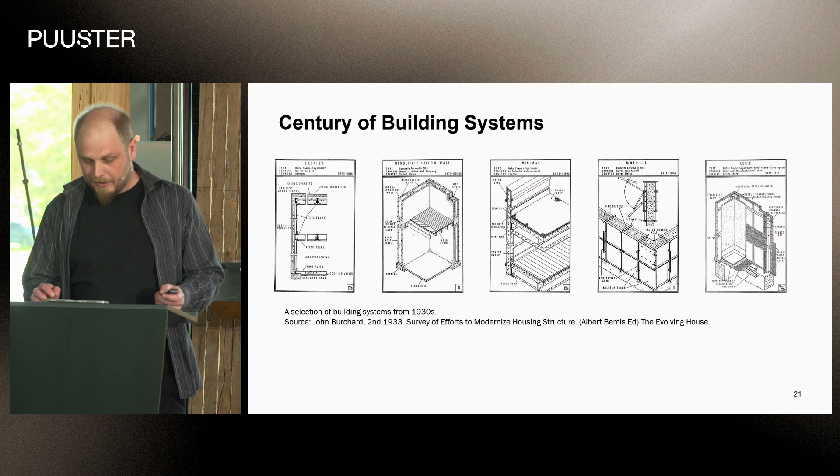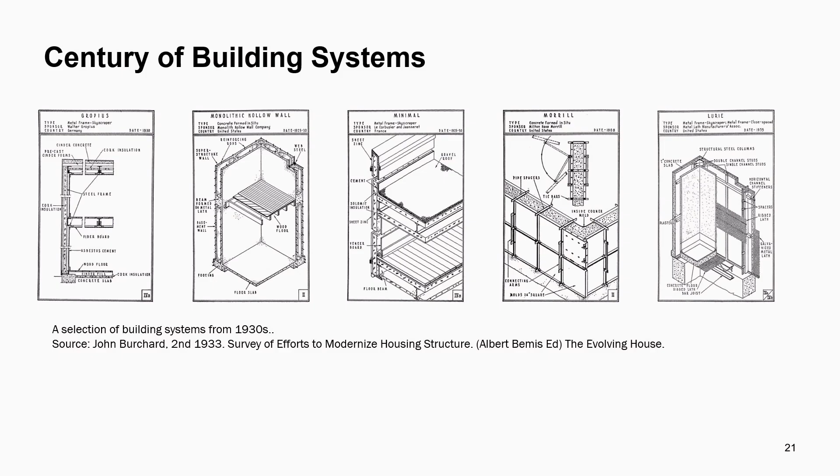Expected productivity growth in construction. So the images here are actually building systems from 100 years ago, and the expectation to a better and higher quality mass housing was also already there back then, coming with the industrialization.

So my research aims to identify key challenges in designing for modular construction and building systems. By understanding these challenges, we can develop better digital tools for architects, bridging gaps between design, manufacturing, and digital workflows. One of the common issues here is integrating data across design tools and stages for the building design.

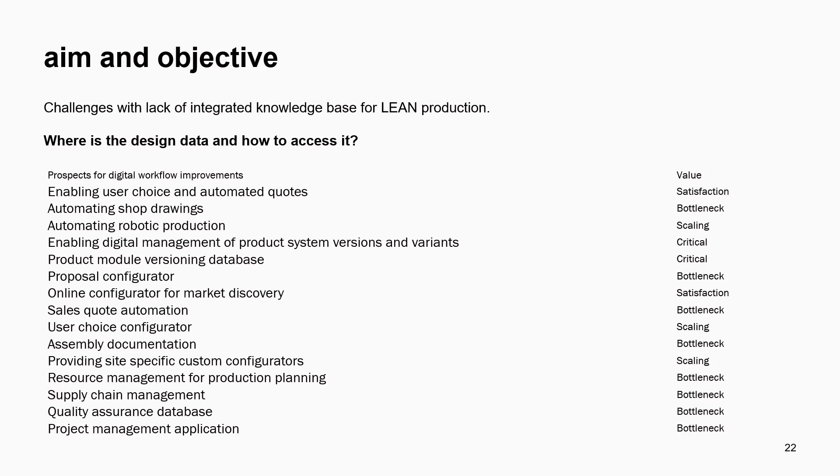A major challenge for manufacturers' workflows is quickly and accurately responding to architectural proposals within digital and regulatory constraints. Aligning proposals with production and supply chain processes remains difficult. Digital tools can help better integrate and streamline design to production workflows and feedback.

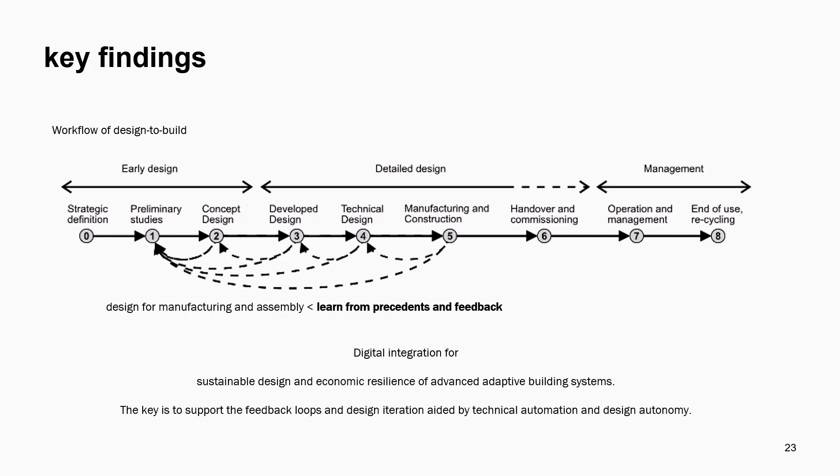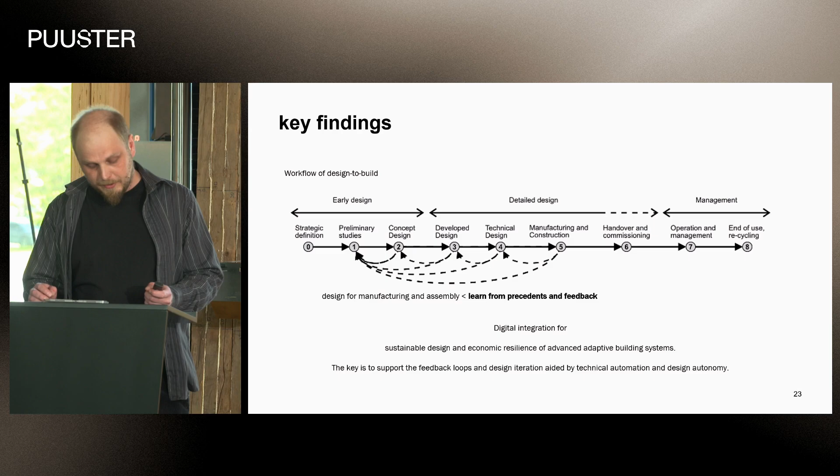So my research uses a creative practice-based research approach, prototyping workflows that combine industry observation and my experience as a computational tool developer and designer. The focus is on how architects can engage with modular systems, recognizing space as a central architectural intent.

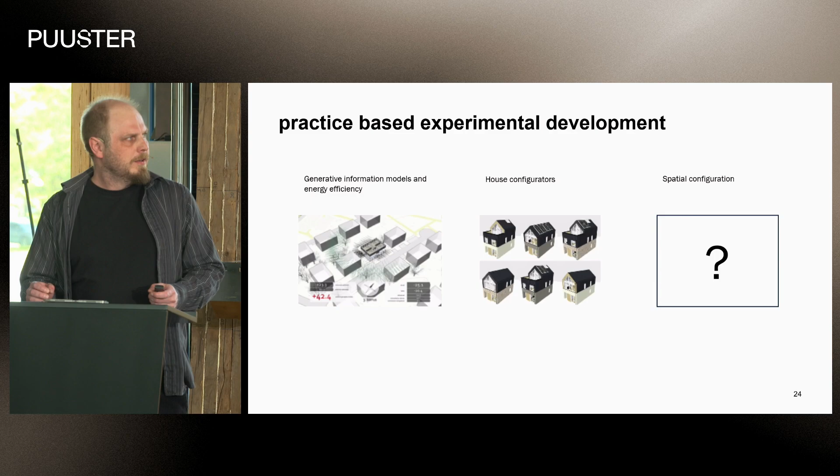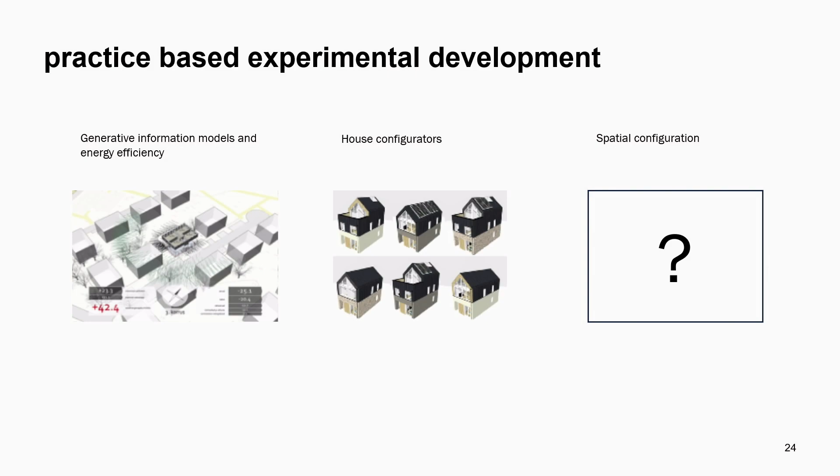So the earlier projects that I've done with digital information and modeling have involved energy efficiency computation and housing configurations, which has led me to question how architectural involvement with very diverse spatial expectations can be integrated into the process.

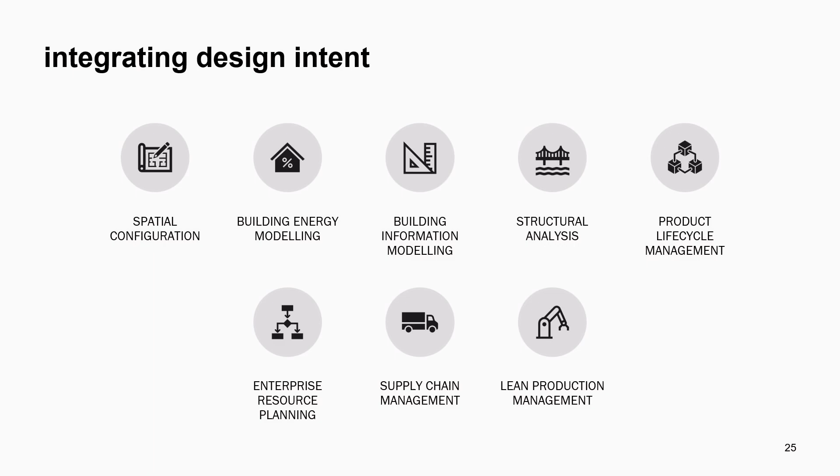So in this case, we need to integrate a diverse set of information systems, from design intent to manufacturing to operations to reuse and circular life of materials, and building operations and so on. Seamless workflows require integrated relational data models, but conventional building information models focus on geometry and hierarchy, and this causes issues when combining spatial models. So my question is, could spatial configuration itself be the platform for BIM and manufacturing integration?

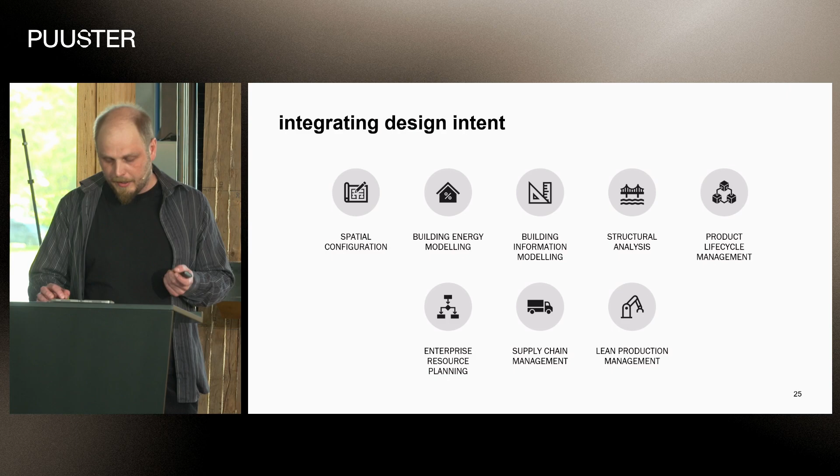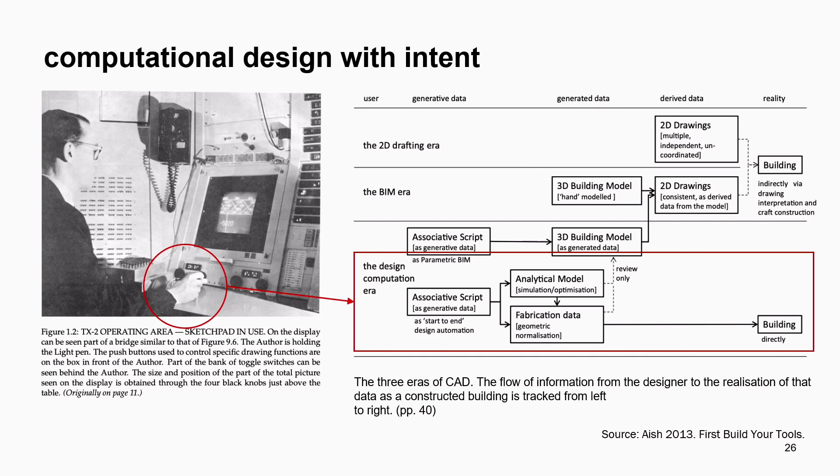Looking at the early process of developing digital design tools, these tools were developed to offer computational assistance with geometry and analysis. But today's conventional BIM tools mostly replicate traditional drawing and manual modeling of buildings. So my research aims to empower architects to model the abstract configuration of space as a digital entity model, making it easier to iterate and bridge the construction and fabrication models.

To create a domain-agnostic spatial model, I used the TopologicPy library for spatial reasoning. This enables composing geometry and attaching semantic information, allowing extraction and linking of building entities for generating construction data and further detailing in building information models and manufacturing models.

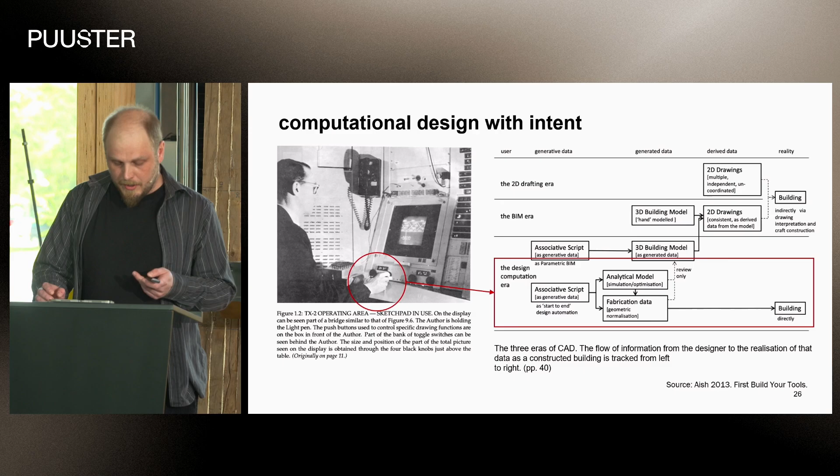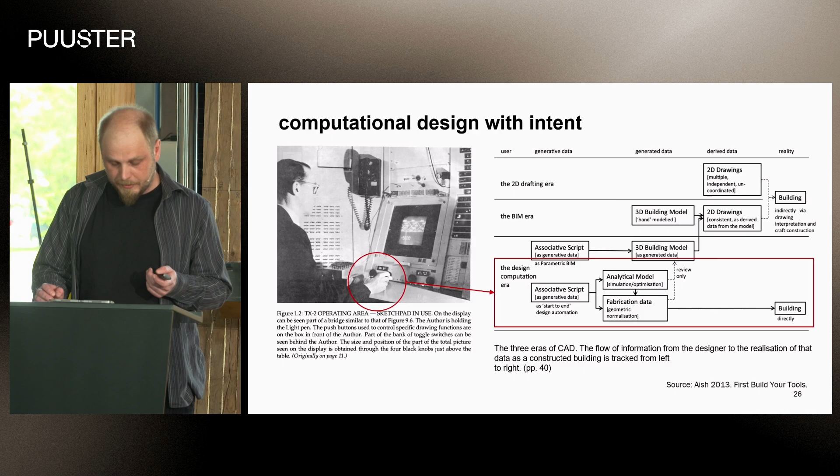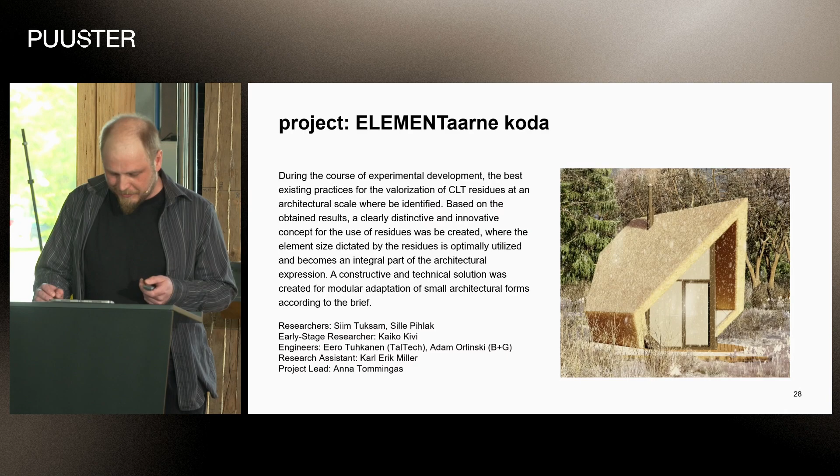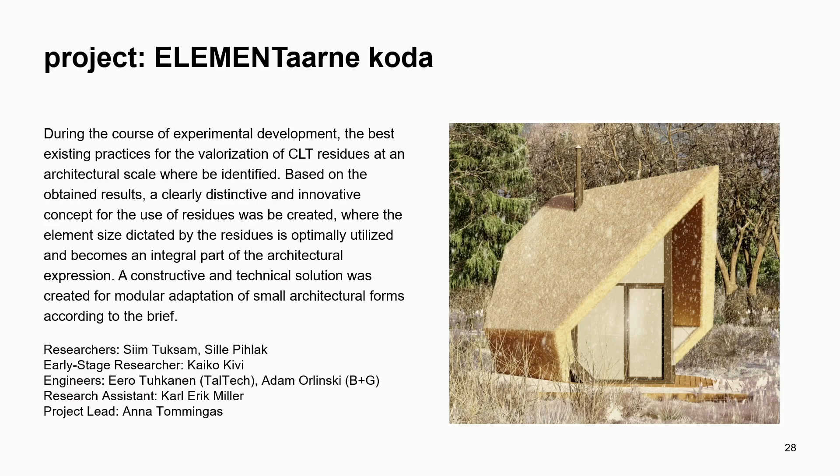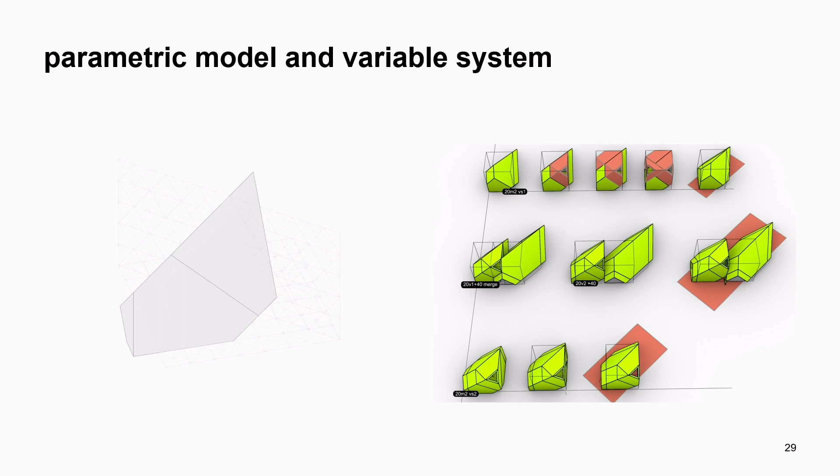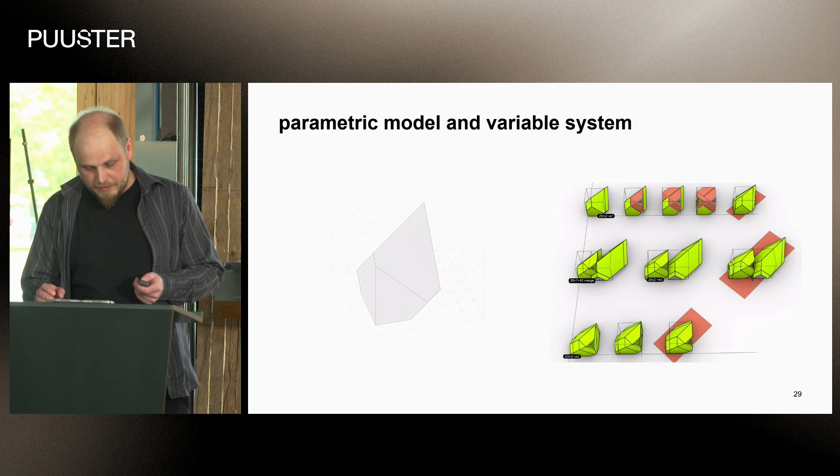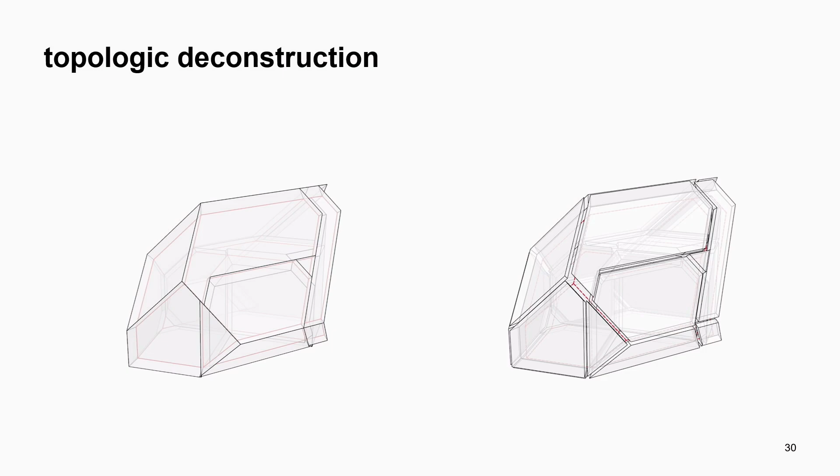So the system itself uses offcuts as standardized elements in the grid. A parametric model lets us generate designs within these grid constraints. Then we created and analyzed several variants for further detailing. And then we chose one, and the model is then decomposed based on topology, using topologic methods to analyze and automate the building structure.

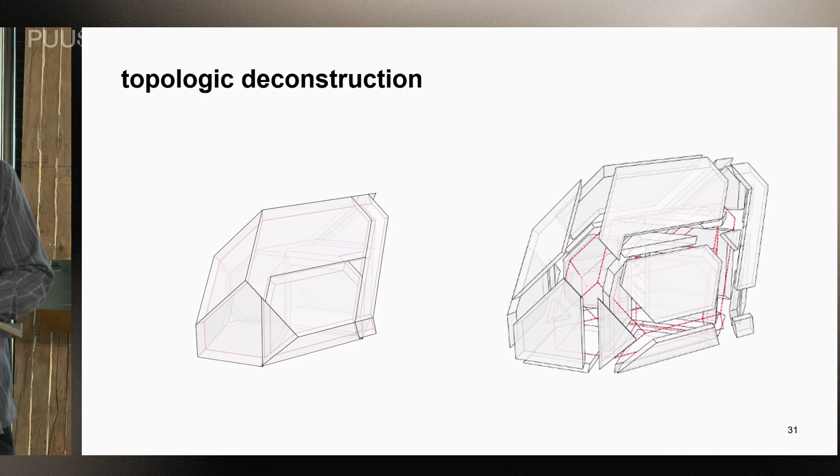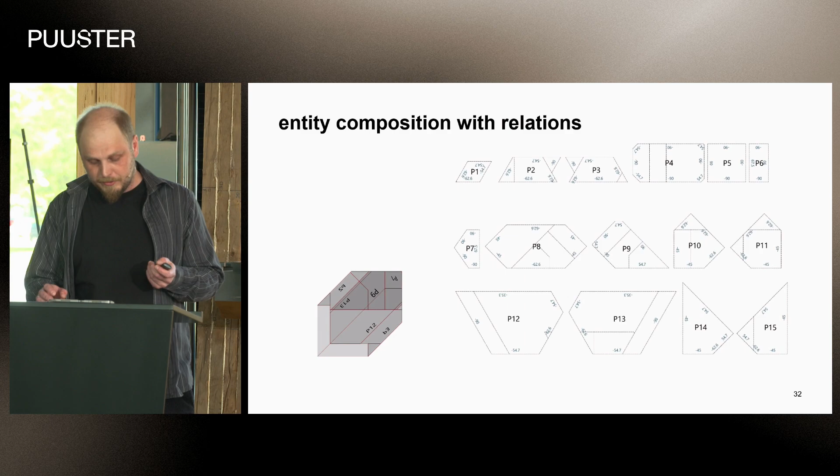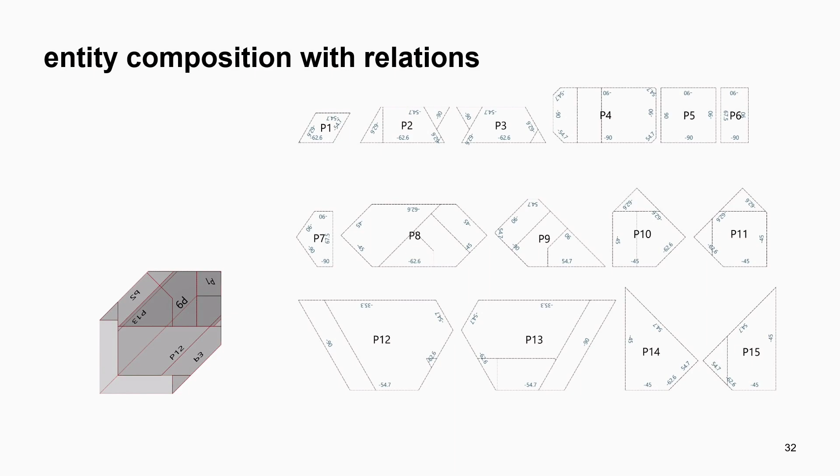So every spatial member is uniquely identified and remains linked to its topologic entity, improving data management and coordination. Model entities collect attributes about their edges and angles, enriching the model for deeper analysis and fabrication. So here the angles between the faces are defined as metadata in these contours for the panels. And as the next step, these panel models are then generated from this metadata, allowing for independent detailing and fabrication of these panels.

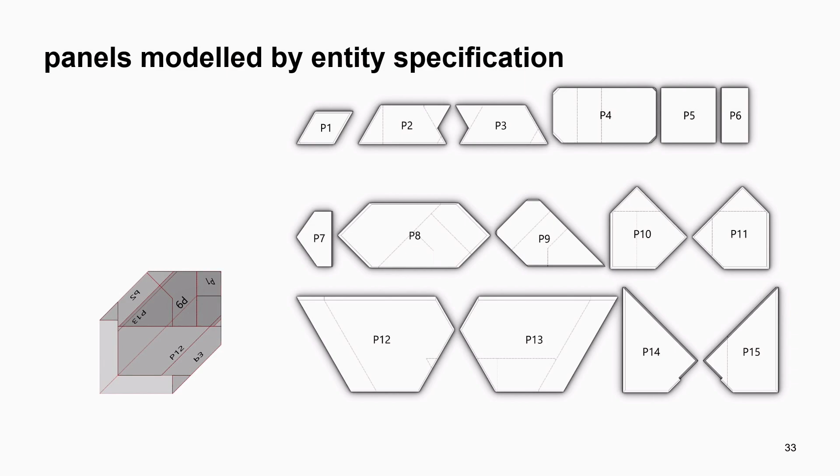Manufacturers' automation could handle this task through online services, for example, so that when the architect details this spatial model, he can get the exact details from the manufacturer instead of specifying and modeling it himself. And together with that, you would be provided information about cost, emissions, and even production timelines and detailed models further on.

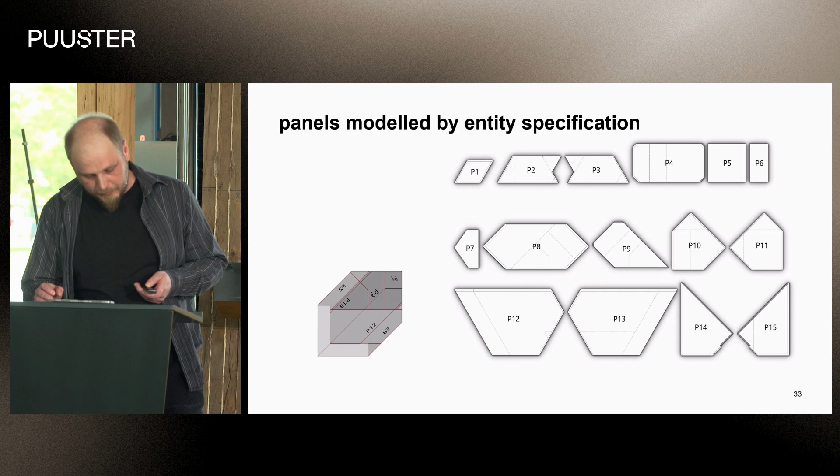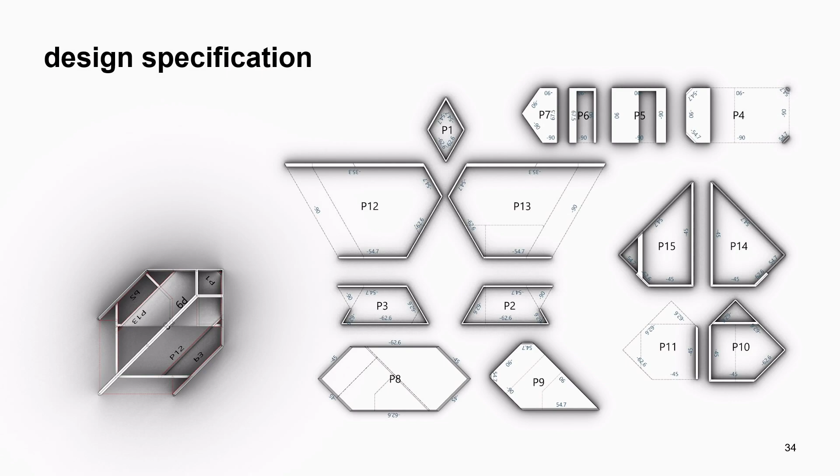In the next autonomous intervention, architects can specify windows, doors, openings, and regions for these CLT offcuts, addressing architectural intent and material details even further. So this demonstrates the importance of architects' involvement in the process and similarly engineers' involvement, being able to adjust the design.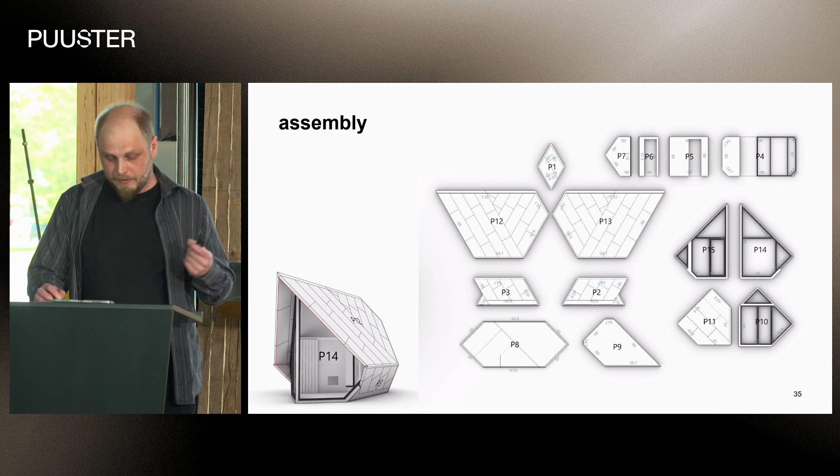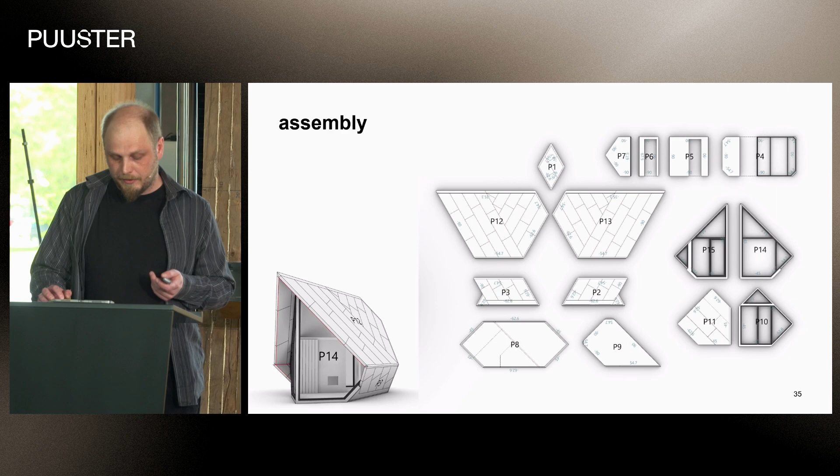So eventually the detailed panels are then reintegrated into the 3D model, making it efficient to explore design solutions through this system, because the process I have shown could take just minutes to iterate over different designs. And also, going through this constraint system, it is easy to validate the design for manufacturing in real time. So you will always know that these elements will be manufacturable.

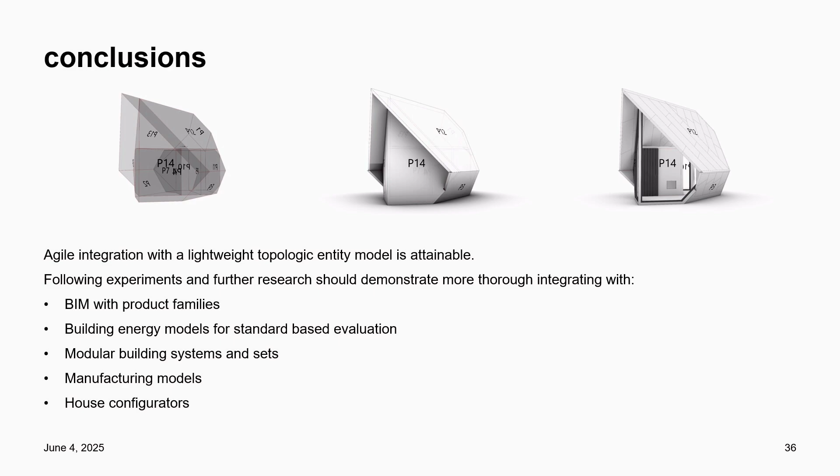So the conclusion that I'm trying to reach is that this process would be fast and allow architects to iterate over designs that are flexible and not constrained so much to what manufacturers set out, so that you don't just take these pieces and use ready-made solutions, but instead you can iterate over the system itself, over the possible outcomes spatially.

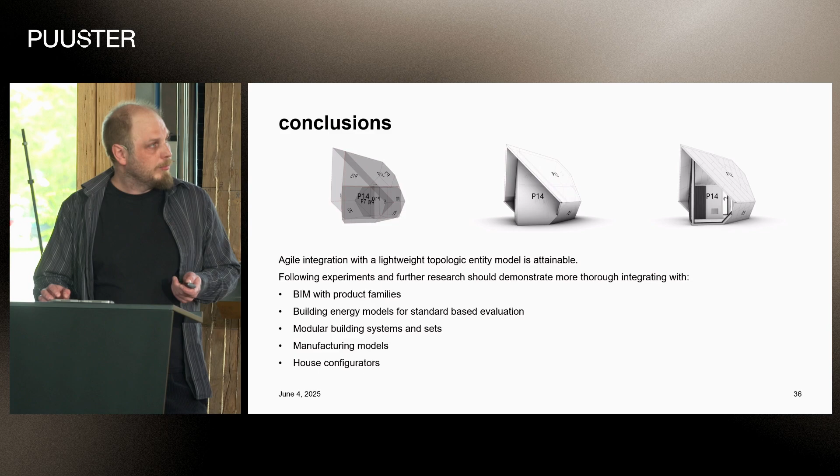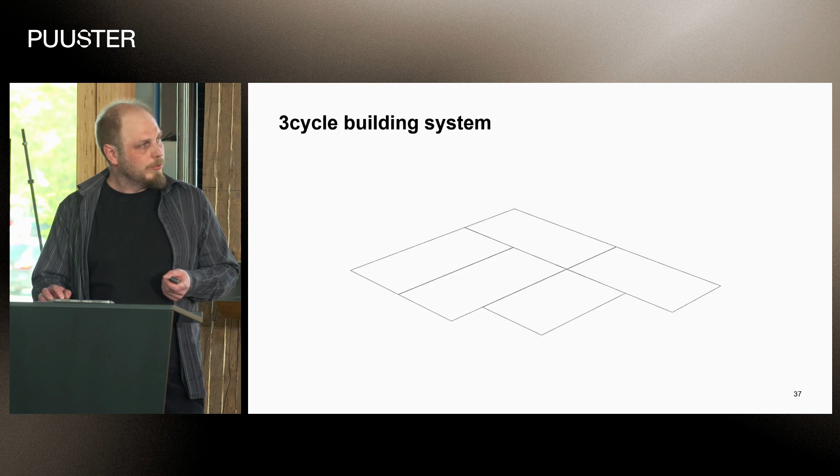And I will quickly show another example based on a 3cycle building system, which is quite like this frame here. This is the older version of it. So imagine an architect just drawing these boxes or rectangles to define where the modules are. The manufacturer systems would respond with the frame.

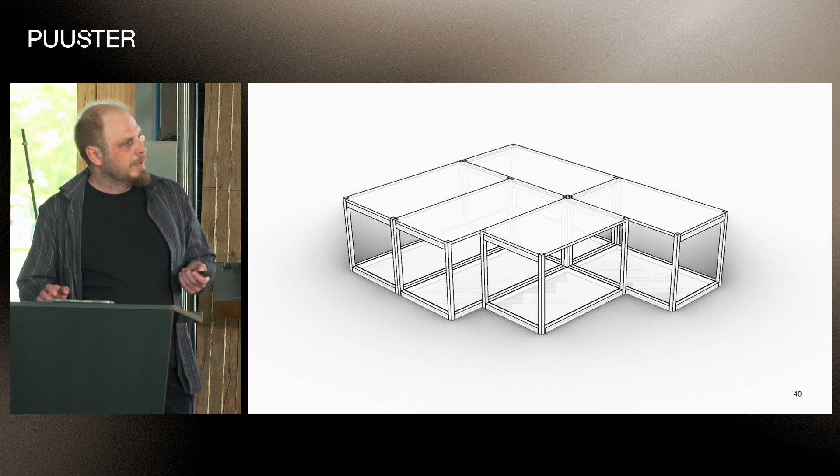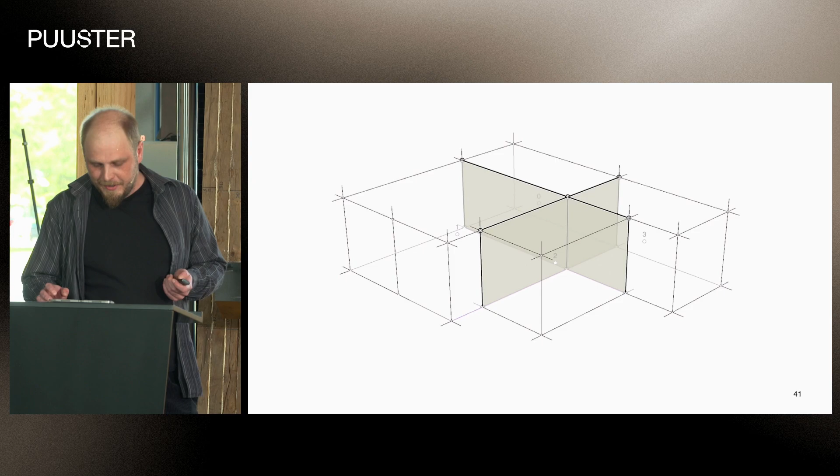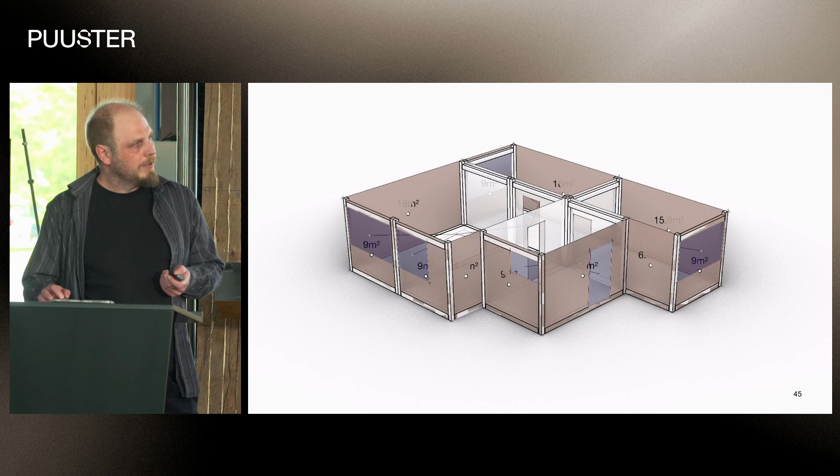And as a next step, you would get all the necessary structural details into your model, and then you would be able to define the sections or divide it into rooms with the structure. And the next step, simply draw some windows and doors. And as a topological model, it will recognize how the rooms are connected through doors and how the walls and elements are connected with each other, what is the external shell and what are internal walls.

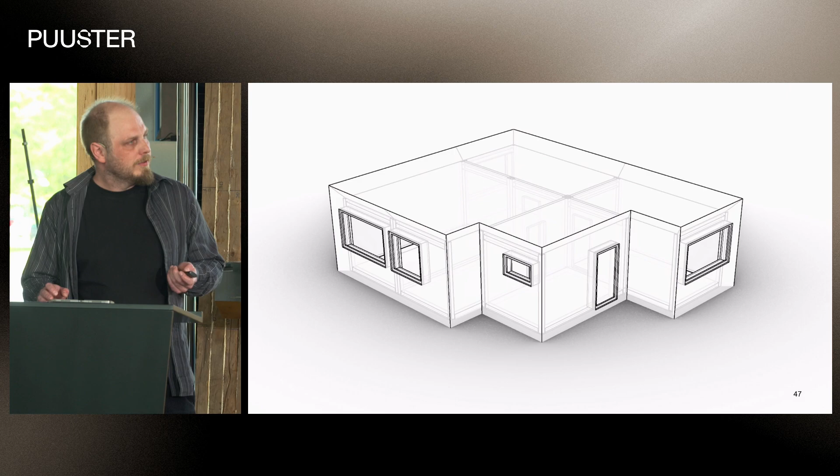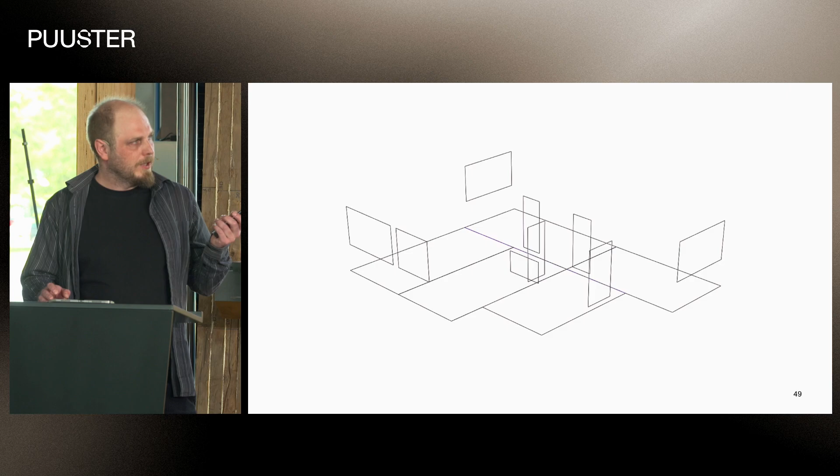And this allows for a manufacturing model to be instantly created in the process. And then with further detailing, you would pretty much get a ready-made building, so to speak. And just to remind you, this is the input that the architects would be required to do, to iterate over many models.